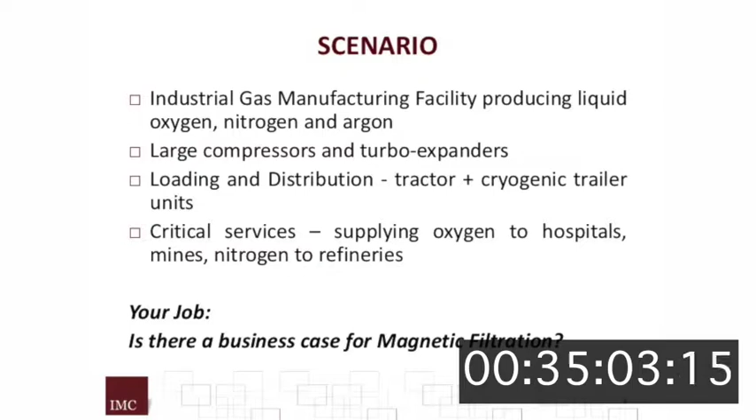So, getting down to business. My background was getting my hands dirty in plant startups, geophysics, data acquisition stuff, and later in manufacturing. At one time I was CFO of an industrial gas company, so I pulled out a scenario of an industry I know a little bit about.

So really, air separation is about producing liquid oxygen, nitrogen, and argon. Large compressors, turbo expanders, and these facilities usually have a loading and distribution division. We've got tractors and cryogenic trailers, and that's a critical service—you're supplying hospitals with oxygen and nitrogen, and refineries and mines. So you really can't stop delivering these things. It has to be continuous.

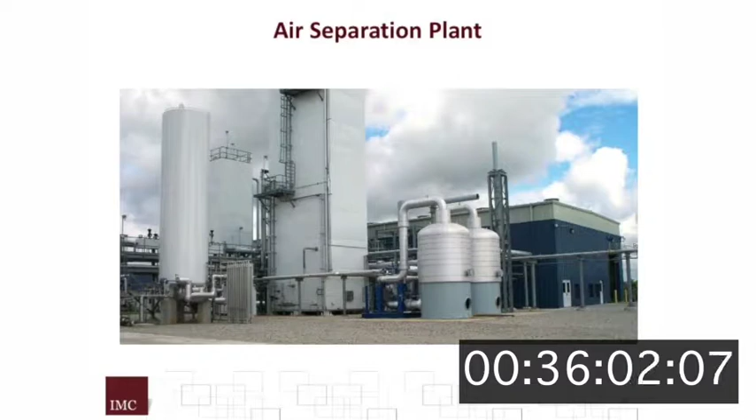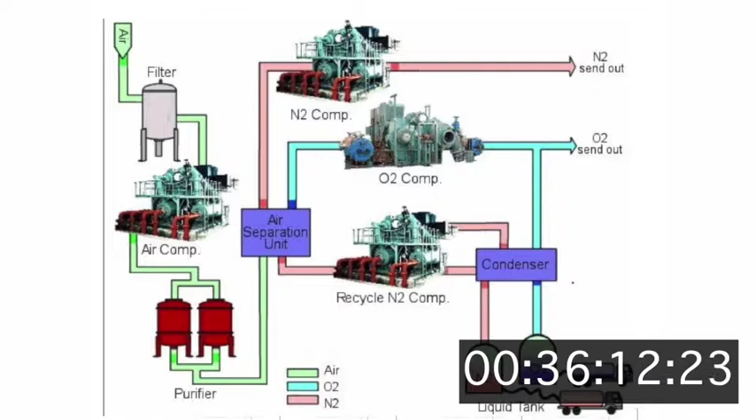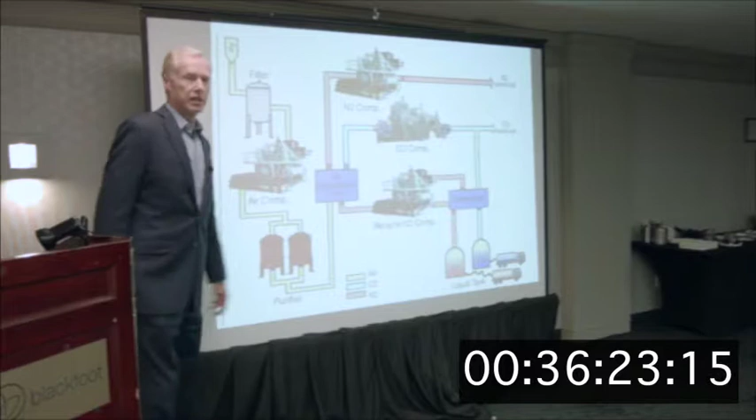So our job is: is there a business case for magnetic filtration in an operation like this? This is a typical air separation plant, with a lot of the compression happening here. That tall tower is called a cold box, which gets to minus 200 degrees C. So really what we're doing is sucking in fresh air, doing some initial filtration—this is the main air compressor, about 3,600 horsepower—and then it goes through some molecular sieves to get out water, hydrocarbons, and CO2.

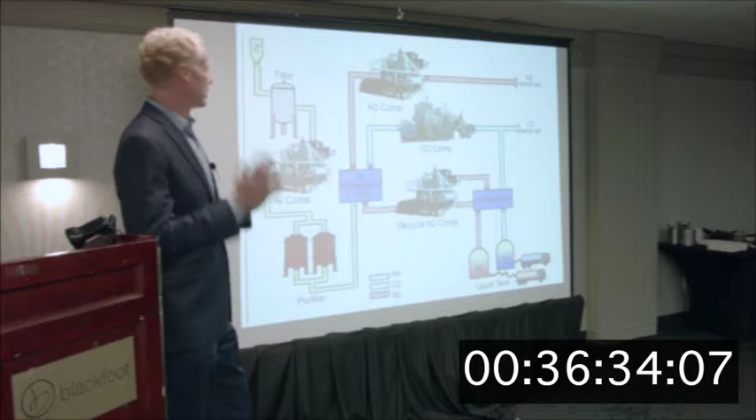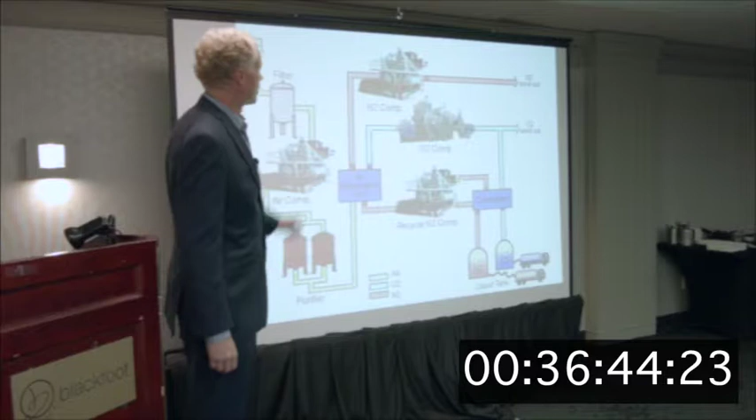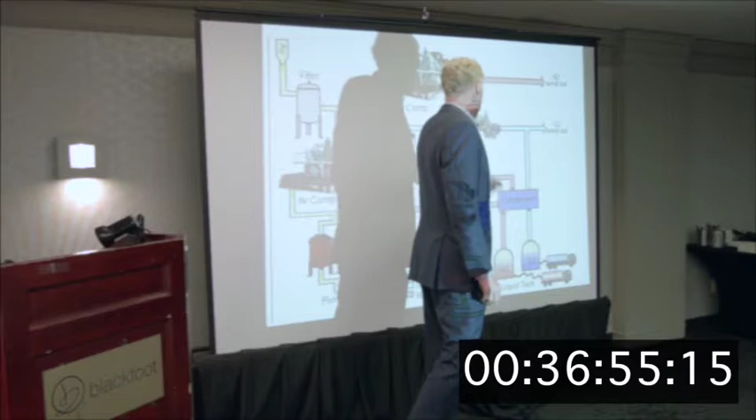And then the expanders basically take the compressed air, expand it, and cool it. More big compression if you want to sell it in gaseous form—say you're selling it to a refinery, nitrogen pipeline, or selling gaseous oxygen—another big compressor to get it out to the customer, which could be a few miles away. And if you want to condense out the liquids, then again, more compression, and we condense that out.

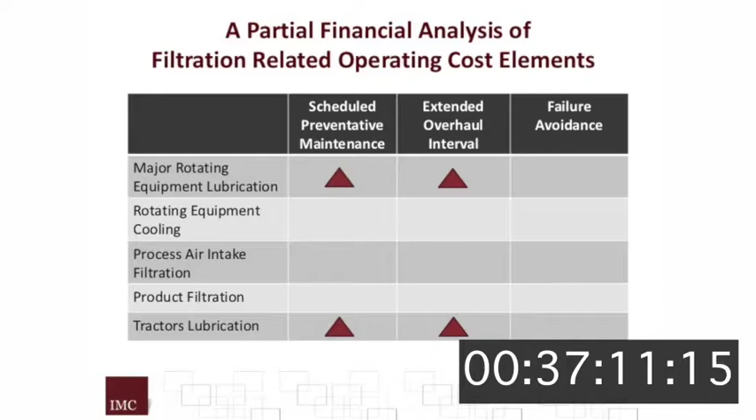We're going to look at a whole bunch of potential savings economically with additional filtration. So we're going to look specifically at major rotating equipment lubrication in terms of preventative maintenance schedule improvement, and also extended overhaul. Failure avoidance needs a lot of data to get that, and we don't have a lot of data yet.

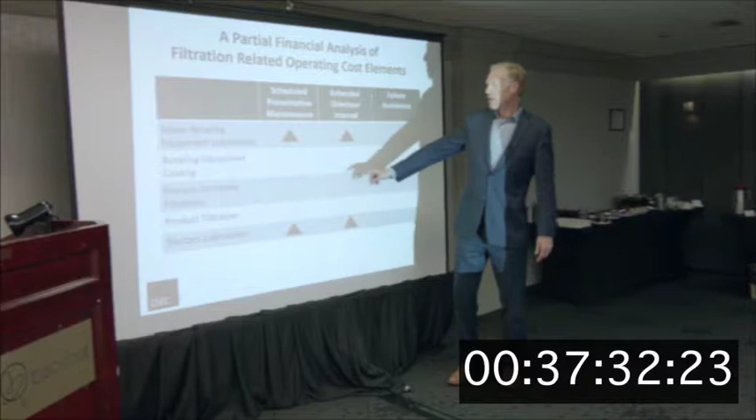Rotating equipment cooling, obviously potential. Process air intake—again, you're sucking in massive quantities of air and having to clean that up, so there's also some big potential savings there. Product filtration, so the liquid product to the customer out the back end of the truck—potentially opportunities there.

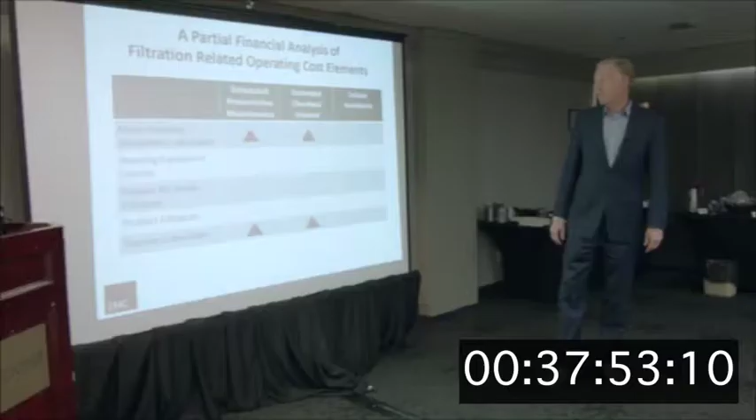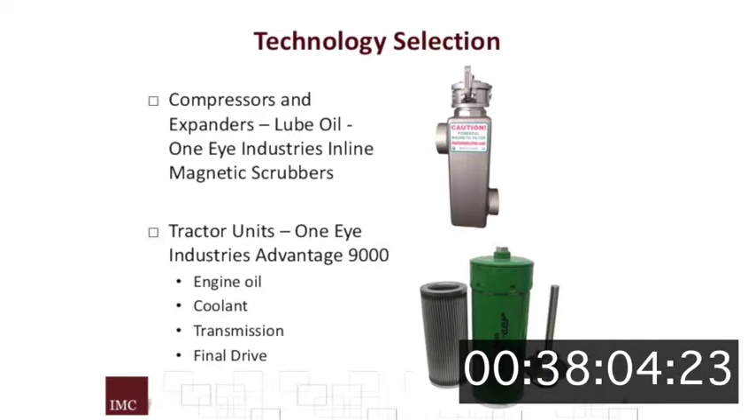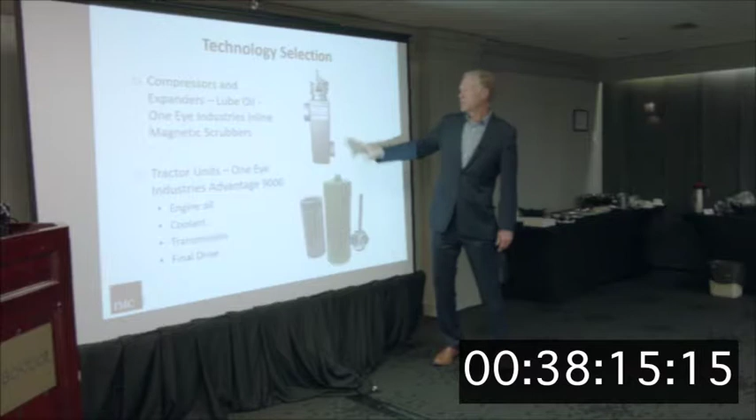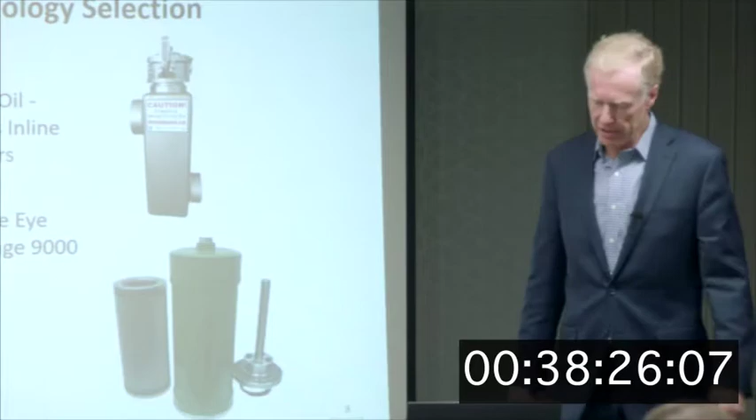So on the other side, we're just going to look at the tractor lubrication side of the transportation—so just four elements. In terms of technology selection for magnetic filtration, we would go with the compressors and expanders: One Eye Industries, on the lube oil side, magnetic scrubbers. We'd probably use a dual inline scrubber rather than the single one shown here. And for the tractor units, Advantage 9000—again, put the whole kit on, but we're just going to look at the economics of the actual lube oil. This particular plant has two separate process trains.

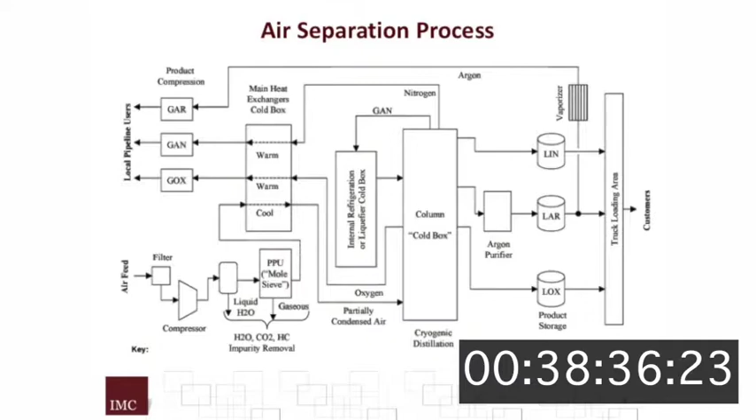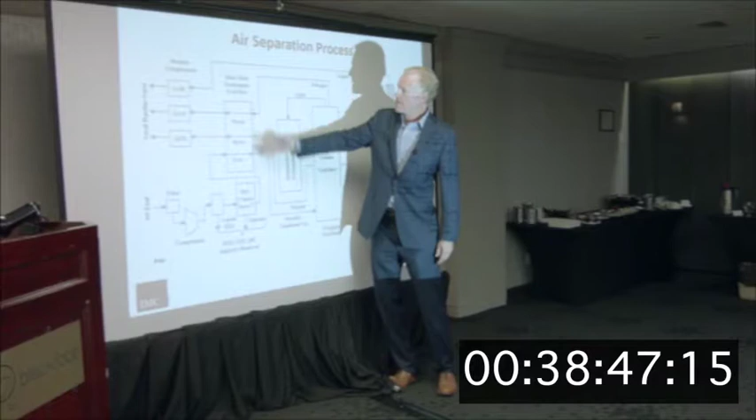For simplification, they're similar to this. Again, we're cooling here, or cleaning it up here. There's massive opportunities also, which I didn't talk about, for the glycol systems here, because in this particular plant we had a glycol tube failure, and it was expensive.

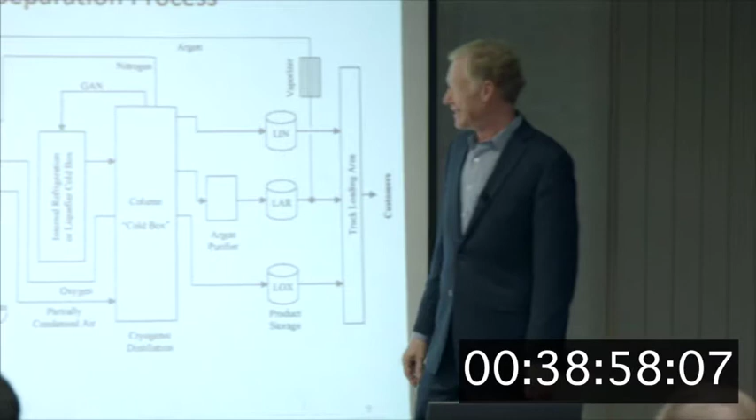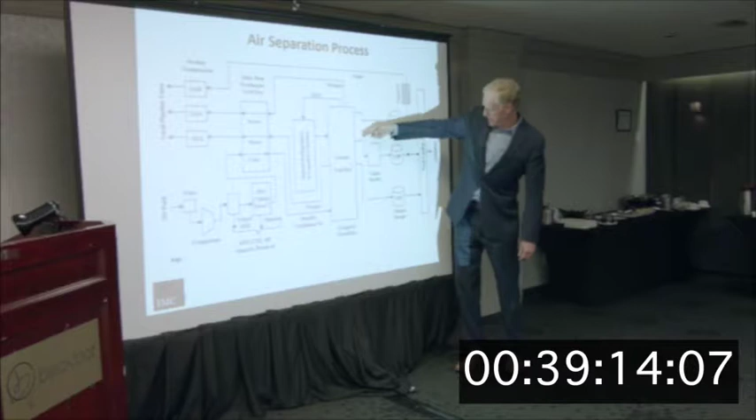So again, here's the cold box I talked about. So the gaseous nitrogen comes off. At minus 196, the nitrogen separates out. You can get the liquids. Minus 186, the argon comes off, and 183, the oxygen comes off, and then we load it onto the trucks.

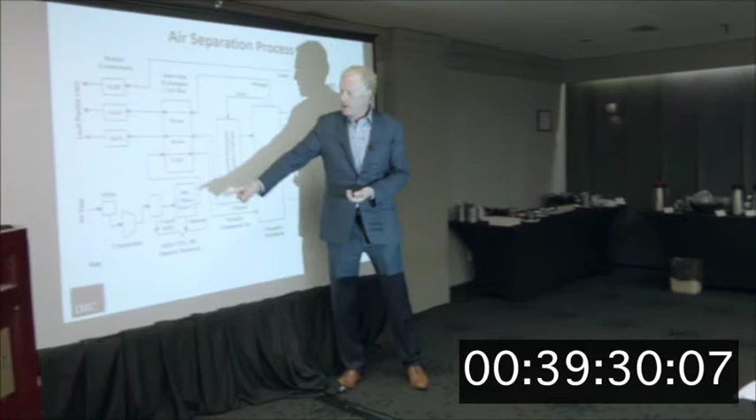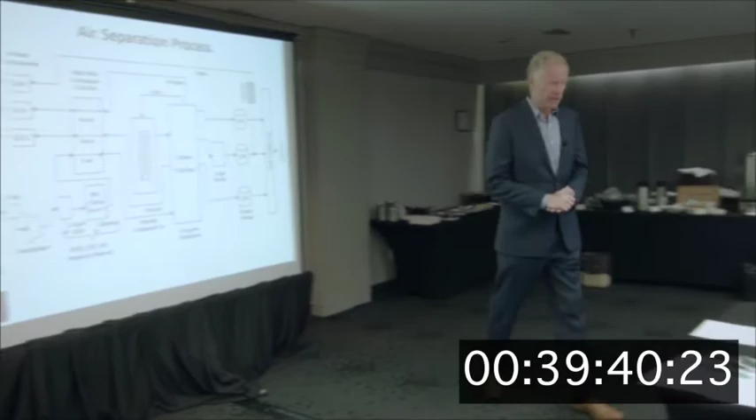So a typical oil change interval on the big compression and the turbo expanders is 12 months, and these things have 100-gallon oil reservoirs, so they're pretty big. So 400 liters. So let's get into the numbers. I got lots of numbers, and there's only about 15 of these slides.

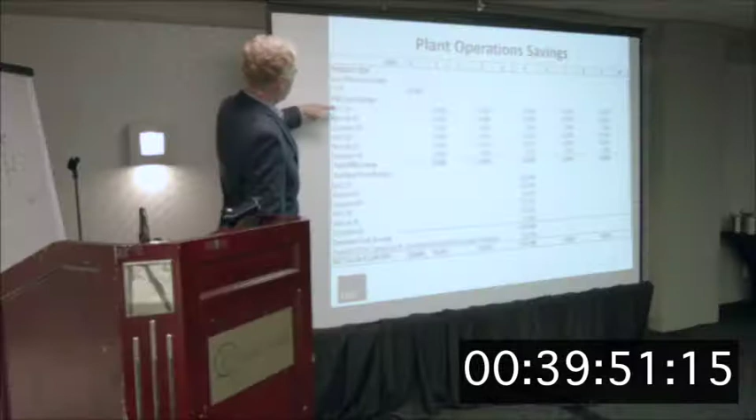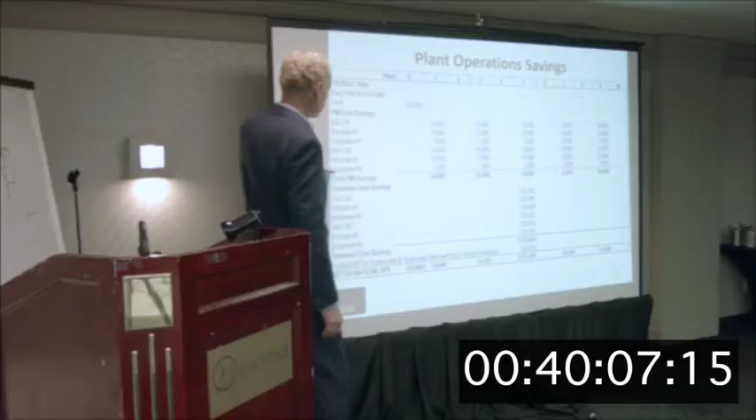So in this case, we got 6 different units. The main air compressor for train 1, recycle train 2. There's a whole bunch of other little pumps and compressors, but for simplicity, let's just stay with a few of the big pieces and see what the economics look like. So again, train 1, train 2. Each oil change costs $10,000 for the bigger units, $7,000 for the expanders, oil and filter change.

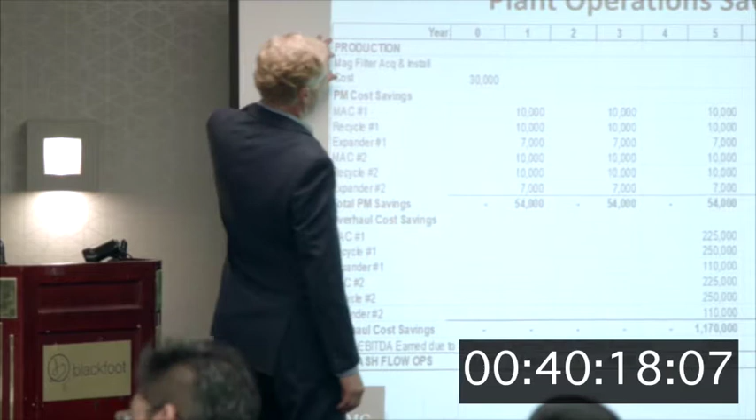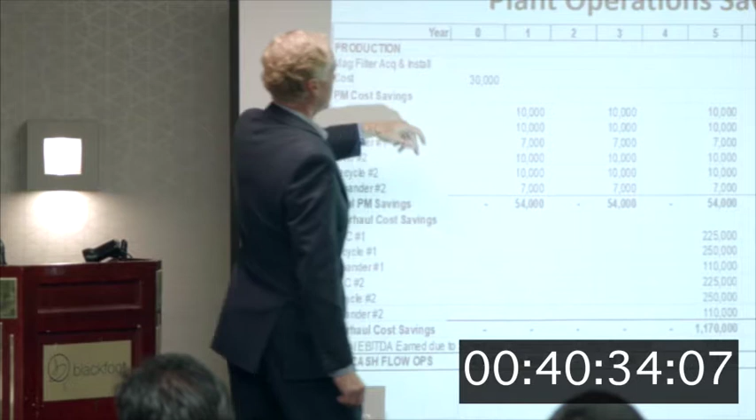And the philosophy here is, instead of doing this every year, we're going to now do it every 2 years. So every second year, we're going to have some savings. So really all we're doing on all these tables is how much savings are we generating. So we got $30,000 for the initial equipment purchase and installation on the 6 units. And so every second year, we're going to be getting this $54,000 benefit.

Overhauling these things is not cheap. $225,000 for the main air compressor, $250 for the recycles, $110 for the expanders. So you're looking at $1.1 million every time you're doing an overhaul. And the current interval is 5 years on these things. So what we're saying here basically is we're going to try to take this out to a 10-year interval.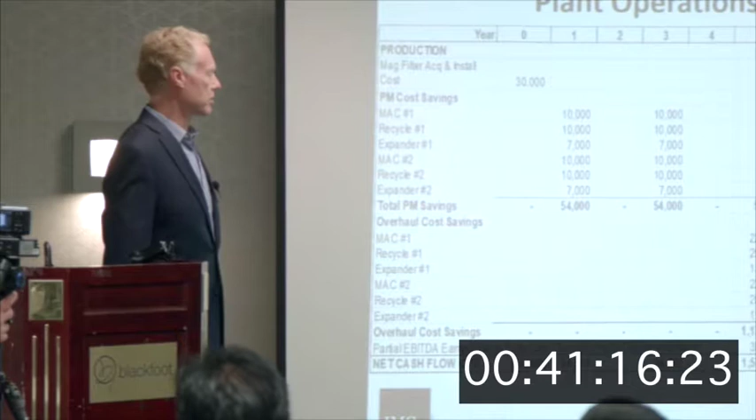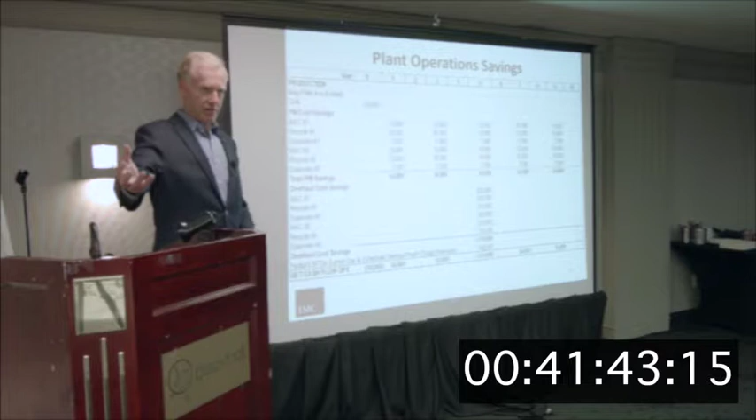And this is fairly clean service. We're not talking dirt in mines and stuff like that. So based on what we've learned so far from the cases, we think it's fairly reasonable to pull this off. Partial EBITDA earned due to scheduled overhaul. So basically, this is the lost profit due to downtime, which you're actually not foregoing. Again, as I said, you can't stop delivering to customers. So really all you're doing is buying product from your partners or your competitors that may be 500 miles away, but still shipping that same oxygen to the same hospital. So you're losing some margin.

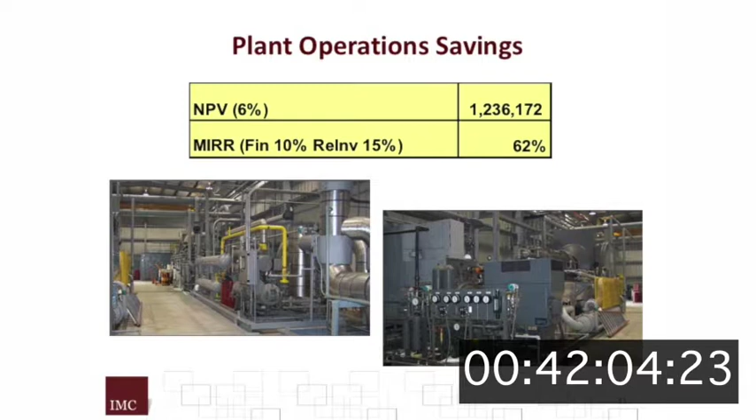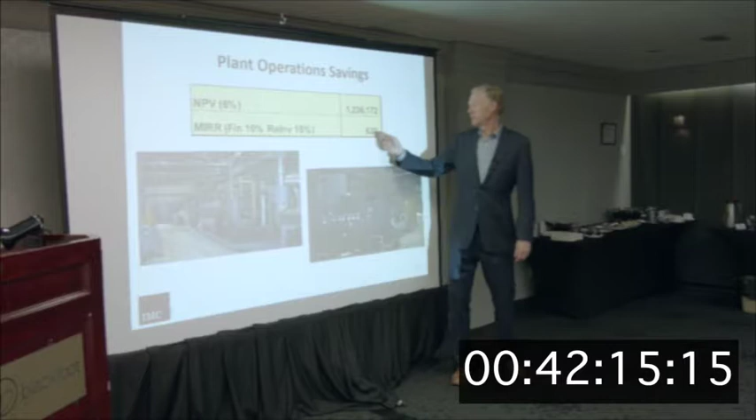So if we look at the net cash flow, our initial investment of $30,000, and then our savings as they flow in, we'll just tabulate it all up so it's easier. So we're looking at net present value at 6% discount rate of $1.2 million over 10 years, and a modified internal rate of return with a financing rate of 10% and a reinvestment rate of 15% of 62%. So it's a pretty nice rate of return. There's a picture of the inside of one of the process trains, and here's a picture of the main air compressor.

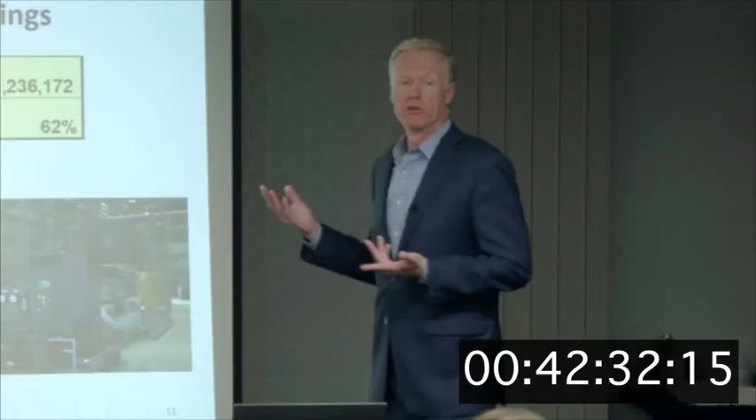So in the payback on this, basically, we're not foregoing our oil change till the end of the first year. So basically, you're going to have a payback of 1 year on this thing.

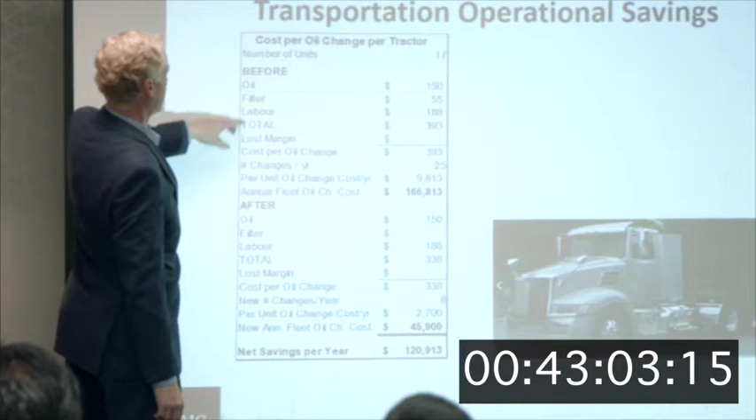On the transportation side, this is like, I call it an owner-operator situation, but there's 17 units. So we ran these units as long as we could and would overhaul them. So if you look at the before-after situation here, typically, what's currently happening, oil filter changes, you get a total of about $400 per oil change.

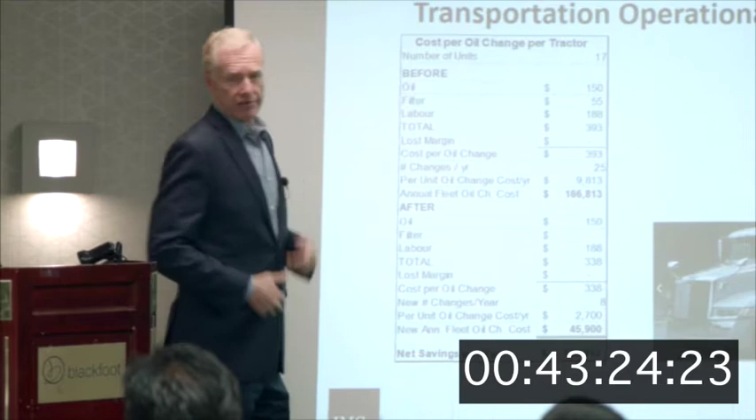Lost margin, so again, what profit do we lose by turning these things around? We said 0 because it's not 100% utilization, so we can always squeeze in an oil change. It's not a big deal. But right now, doing 25 oil changes a year, and so about $9,800 a year on that, so annual fleet cost $166,000. After putting the magnetic filtration in, obviously filter cost goes away, but be very comfortable going down to eight oil changes a year.

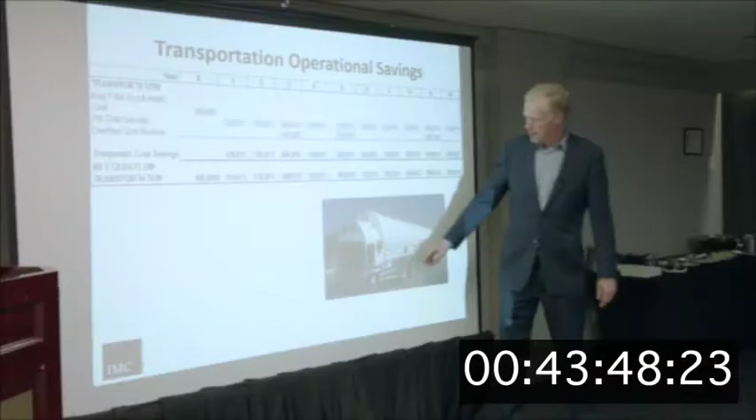These are very high mileage units. And so you're basically going down to 45,000, so your net savings is $120,000 a year. That's a liquid oxygen trailer. So these are like, I don't know, 300 to 500 grand, depending on what shape you get them in. And here's where there's the cryogenic pumps where we pump the liquid oxygen into the hospital tanks, for example. And again, you might be able to stick some kind of magnetic filtration on there.

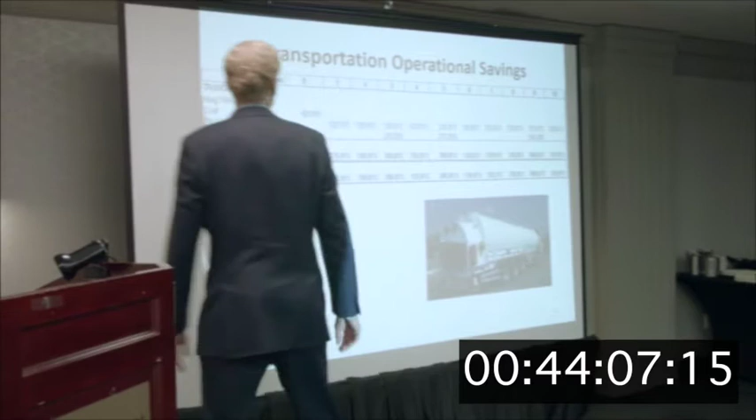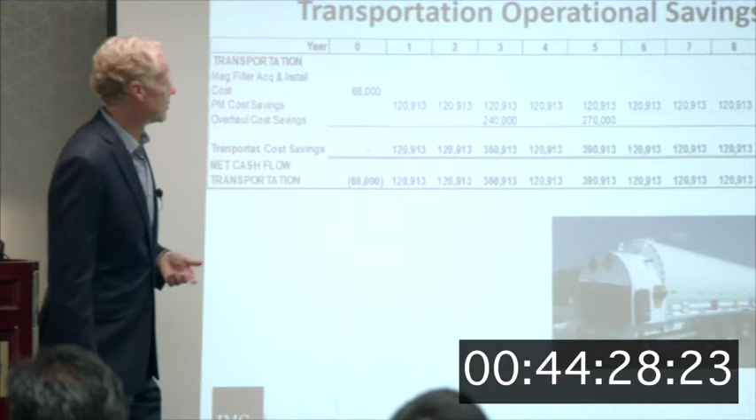So overall, the cost savings here, again, in this case, the payback is pretty much first year, no problem. Again, we see the cash flows over time. Now, I should touch on the overhaul frequency here, based on the existing and some of the new units coming into the fleet. About $30,000 per unit to overhaul, and we'd be basically going from 3-year to 6-year overhaul interval.

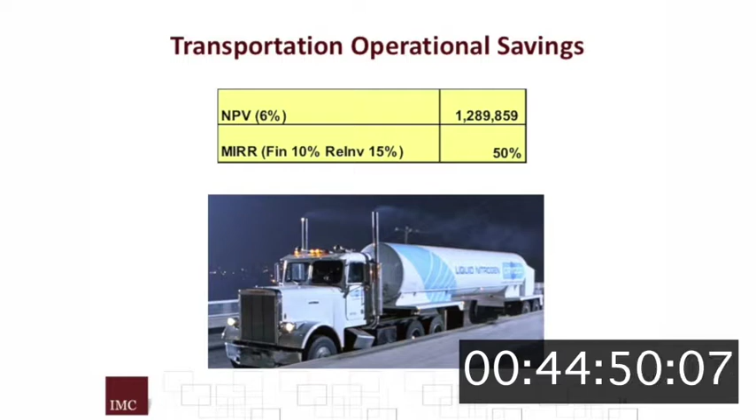So in year 3, we'd be saving $240,000 on part of the fleet. Year 5, $270,000 on the other part of the fleet, and then the same fleet again in year 9. We'd be skipping that particular overhaul. So summarizing this, net present value of $1.2 million and rate of return of 50%. So again, if I'm a CFO and I'm saying, okay, where can I spend my money in the next 12 months, 24 months? There's not a lot of competing investments that are going to be at 50%.

So you got to pitch it at the right level in the company, right? And so if you can come up with this kind of argument and go through the layers of management so that your manager looks like a hero, then Rich and I were talking about this. Yeah, you just basically got to convince the people all the way up the chain. So in addition to the pure economics, when you're dealing with the executive level, you're going to have a whole bunch of other hot buttons.

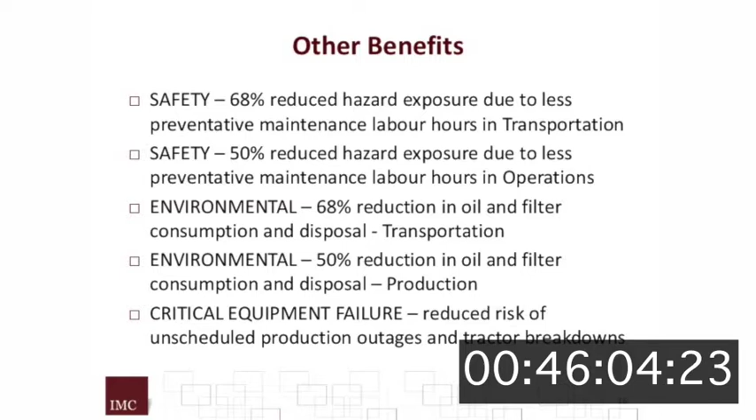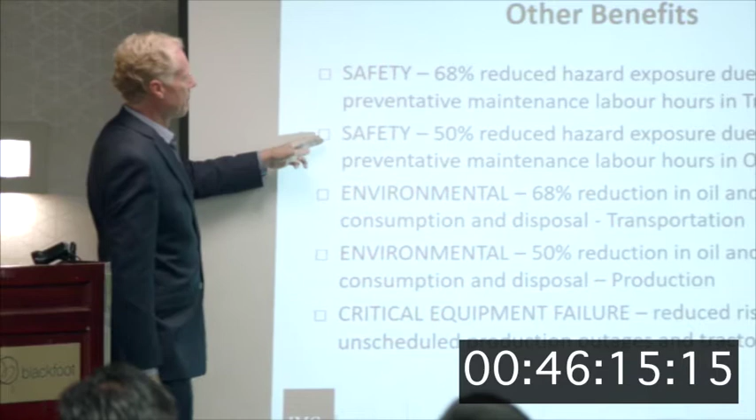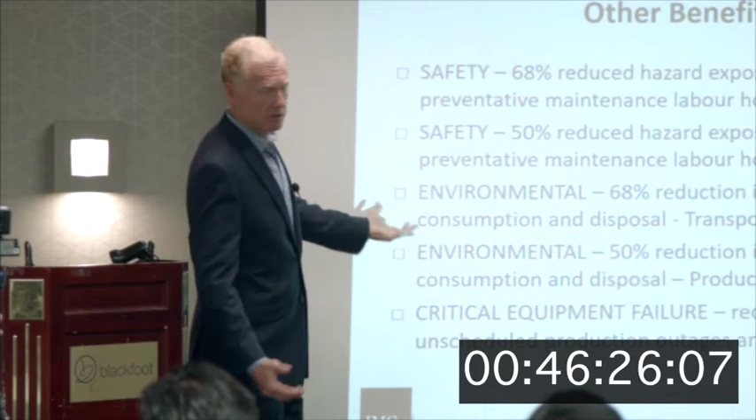Safety, obviously. In this case, we're going to reduce our hazard exposure by 68% due to less preventative maintenance labor hours in transportation. Safety, 50% reduced hazard exposure due to less preventative maintenance and labor hours in operations. Environmental, same kind of numbers, basically reducing the oil and filter consumption in both types of the operation. And critical equipment failures, again, hard to measure, but we had one, and boy, it was painful.

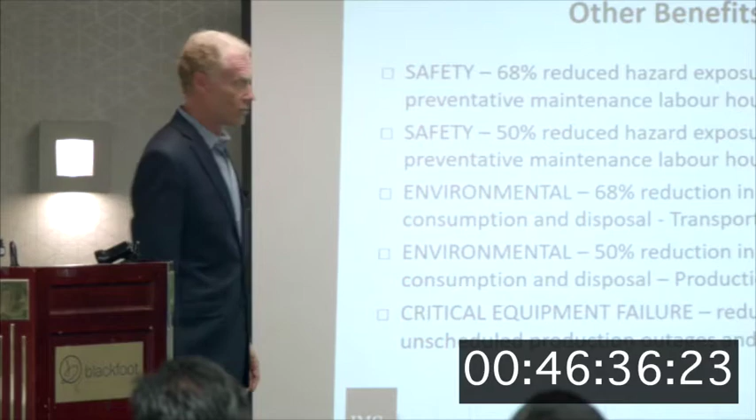You're talking about moving your oil changes out, and that moves your overhauls out. The cost of your overhauls, have they gone up since you moved them out? Well, again, this is a proposal. This hasn't been done yet, right? So, yeah. But again, you could probably add oil pumps and all the other stuff onto it. So your investment wouldn't go up, but your points of failure would go down for sure.

So, for the overall turnarounds, I think if you want to extend your turnaround interval, you got to have more of the equipment on there. You couldn't just do the big guys, right? Your compressors are running 24/7 then, 365 days a year? Yep. Train 1 and 2? Sorry? Train 1 and 2? Train 1 and 2 running continuously.